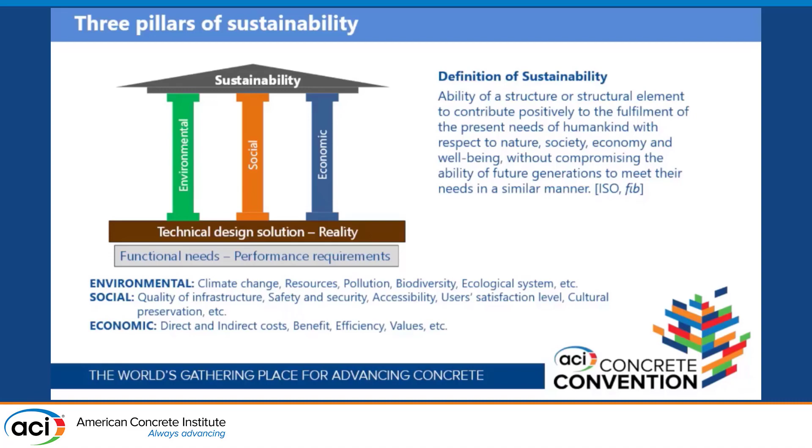So how we are going to include these three pillars of sustainability in the design codes is our main concern. Another issue is life cycle management. The life of a structure is divided into three stages in terms of life cycle considerations: the procurement stage, the use stage, and eventually the end-of-life stage.

The procurement stage includes the vision, plan, surveying, design, and execution: how to construct, how to design, or how to provide the structure to the people. This is just before starting the use stage. And the use stage is probably the longest period of the life of the structure, including operation, conservation, upgrades, and so on.

So through the maintenance work, we should consider the use stage, how we keep the structural performance of structural functions to be satisfied in the design and constructions. And eventually it comes to the life end stages. So probably disposal or replacement by the new structure and so on.

So at the life end stages, we should consider how to dispose the structure, or how to recycle, reuse, or how to replace the new structures. So this is very important, but actually at the design stages, we are not easy to consider how we stop using the structures, but we should do it from the sustainability point of view. So you can understand that the sustainability considerations is a very close relation to how we manage the total life cycle of the structures.

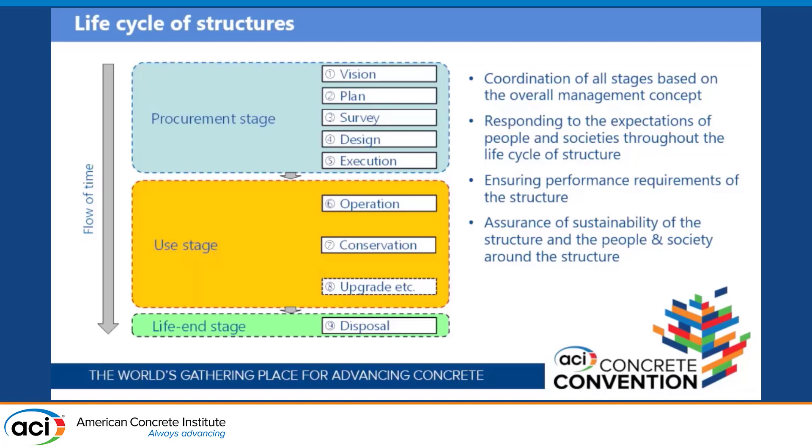So through the life cycle management, we should assure the sustainability of the structure and the people and society around the structure. So engineers should consider not only the sustainability of the structure, but also the sustainability of the people, society around the structure. So this is a very, very wide global idea how sustainability should be incorporated in the life cycle management.

So this slide is very small, so sorry, but this is the flow of life cycle management. We will make the strategies. In this slide, it is written as a scenario. So how we realize the sustainability of the structure, how we ensure the performance requirement of structure, this should be well considered at the very beginning of the life cycle of the structures.

Some people consider such strategies at the use stages, but it is very late. How to realize the structural sustainability should be considered at the very beginning of the life cycle, particularly for the initial design or basic design of the structures. And during the procurement stage, we should draw up the basic life cycle management scenarios, and this scenario is always updated to reflect the current situation of the structures.

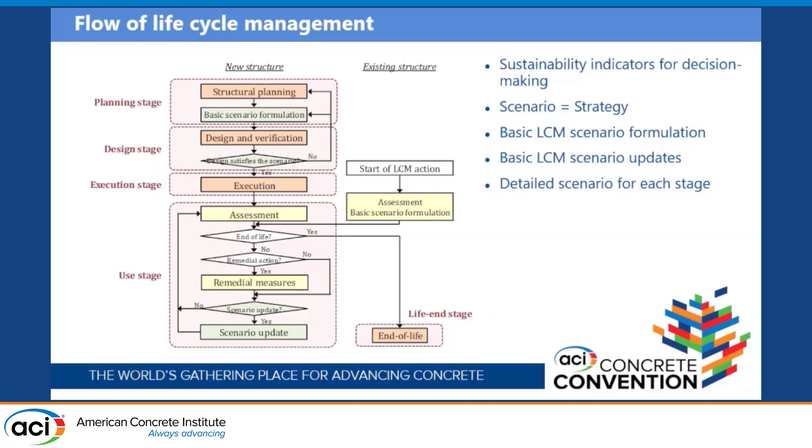And of course, design, execution, and maintenance work should be done with an individual scenario for each stage. So you can understand that we need some very close coordination among the stages. And for the sustainability requirements, at first we should set up which aspect or which detailed aspect of the sustainability should be ensured during the life cycle of the structure. So we collect the basic information about the sustainability of the social, environmental, and economic aspects.

And performance and sustainability requirements will be determined before starting the verification, and structural profiles, material production, and construction method and so on will be considered based on the performance and sustainability requirements. And then we set up the indicators for evaluation of sustainability throughout the life cycle of structures. Then we make the next stage of design, construction, and maintenance work.

And before starting that, we should verify or evaluate whether our basic scenario is reasonable or not, whether the basic strategy is okay or not. Is something wrong? If we can find some improvement of our basic scenarios, we should modify: the requirement should be changed, or some method of the design, construction, and maintenance will be improved, or also the indicators for evaluation of sustainability should be reconsidered and so on.

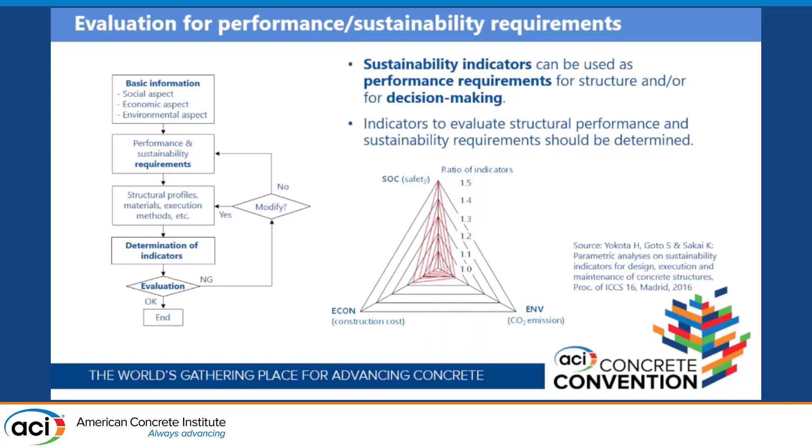So you can find how the most suitable solution can be found among these parametric studies. It can be proposed as this paper. If you're interested in that, please refer to this document.

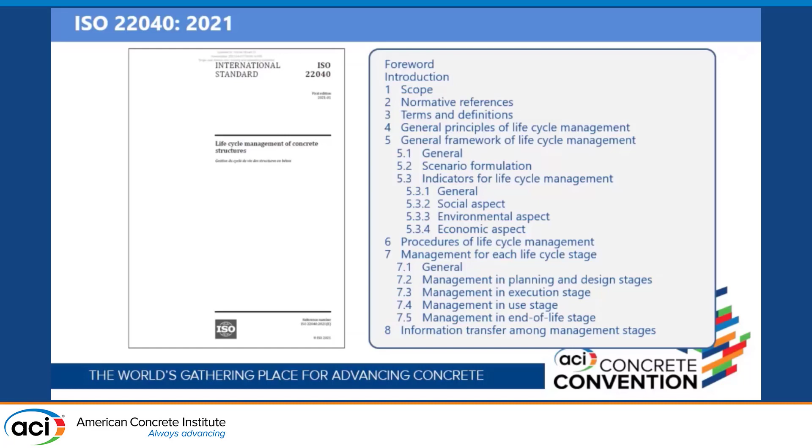The first example about the sustainability design code is ISO 22040, published in 2021. The table of contents is shown on the right-hand side. You can see the indicators for life cycle management are similar to the indicators for sustainability evaluation, like social, environmental, and economic aspects.

This document, entitled Life Cycle Management Concrete Structures, was developed by ISO TC71 Working Group 1, Life Cycle Management Concrete Structures, and I myself am the convener of this working group. The project started in September 2016.

We needed 5 years for publication, and finally in January 2021 it was published. It covers the framework and general principle of life cycle management. It is not a specific document; that is not covered in this document.

That's why we are making another series of documents relating to life cycle management. For example, Part 2 covers life cycle management particularly at the structural planning and design stages, currently at the committee draft stage. Part 3 covers the execution stage, also under development, currently at the working draft stage.

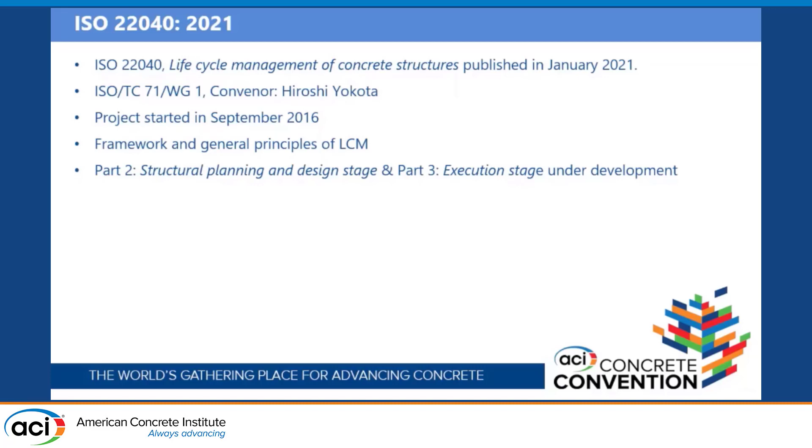These two parts will provide much more detailed specification on how we consider sustainability in these stages of the life cycle of the structures.

Clause 5 of this document, the general framework of life cycle management, gives the specification that when implementing life cycle management, appropriate scenarios shall be created as measures to ensure performance requirements are met during the life cycle of the structure, and indicators are set appropriately.

We should set up the performance requirement with a particularly suitable indicator to evaluate the life cycle of the structures. The basic scenario shall include the fundamental strategies for how the structure will be managed in terms of sustainability, including not only environmental but also social and economic aspects. These indicators should be involved in the design if possible.

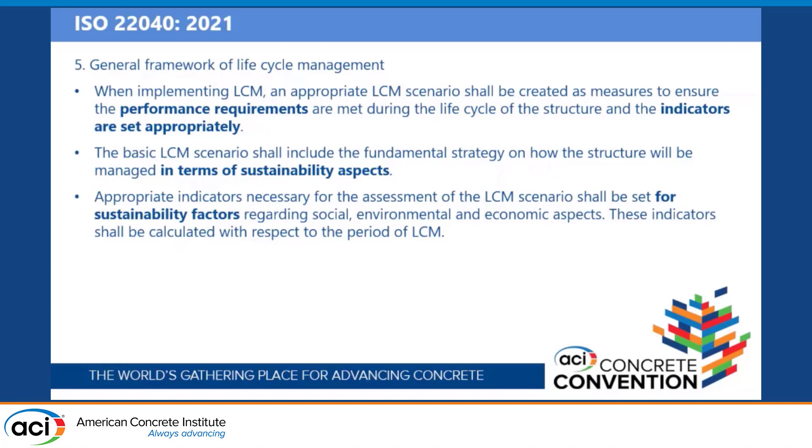Appropriate indicators necessary for the assessment of the life cycle management scenario shall be set for sustainability factors regarding social, environmental, and economic aspects. These indicators shall be calculated with respect to the period of life cycle management, so life cycle considerations are necessary for the evaluation.

A bit more detail is given in subclause 5.3, indicators for life cycle management. As mentioned, for the social aspect to be assessed, indicators should objectively express the performance of the structure, such as the safety of the structure or construction engineers, and so on.

It is difficult to set quantitative indicators for qualities such as adaptability, comfort, cultural values, and social contribution. These shall be considered in a social scientific manner. Some important social aspect indicators are not easily quantified—we understand their importance, but it's very difficult to express them as numerical values. In such cases, they are still required to be considered in a social scientific manner. That is the requirement of the social aspect.

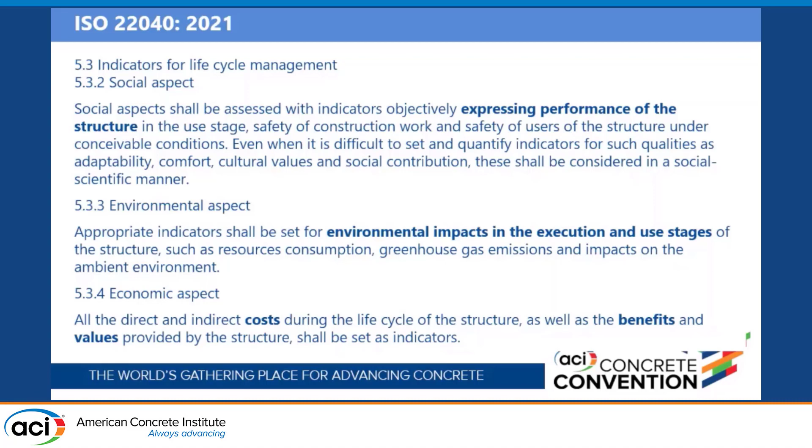For the environmental aspect, indicators for environmental impact in the execution and use stages of structures include resource consumption, greenhouse emissions, and impact on the ambient environment, among others. For the economic aspect, cost, benefit, and values as already mentioned should sometimes be considered.

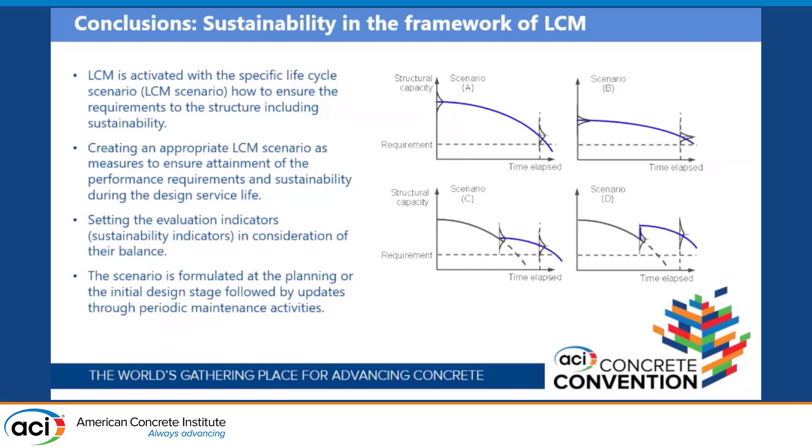There are some examples for indicator evaluation in this document, but due to time limitations I'd like to skip this slide. It is a concluding summary of sustainability as specified in ISO 22040. The next one is ISO 19338, entitled Performance Requirement for Standard on Concrete Structures.

It is being developed in TC71 Subcommittee 4, Working Group 1, Performance Requirements for Structural Concrete, and its convener is Professor Sofia Diniz in Brazil. This document was originally published in 2014, entitled Performance and Assessment Requirements for Design Standards on Structural Concrete.

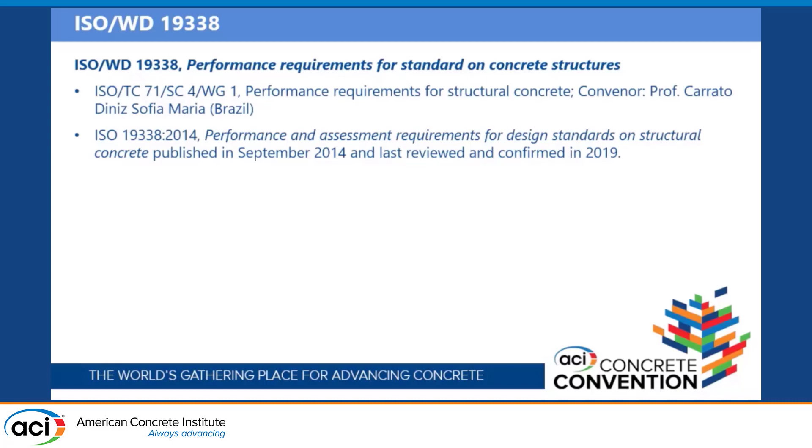It was last reviewed and confirmed in 2019, and we decided to revise this document to make it more practical, including sustainability issues. The left-hand slide shows the original document's table of contents from chapter 1 to 8, and the revised document—possibly, not finalized yet.

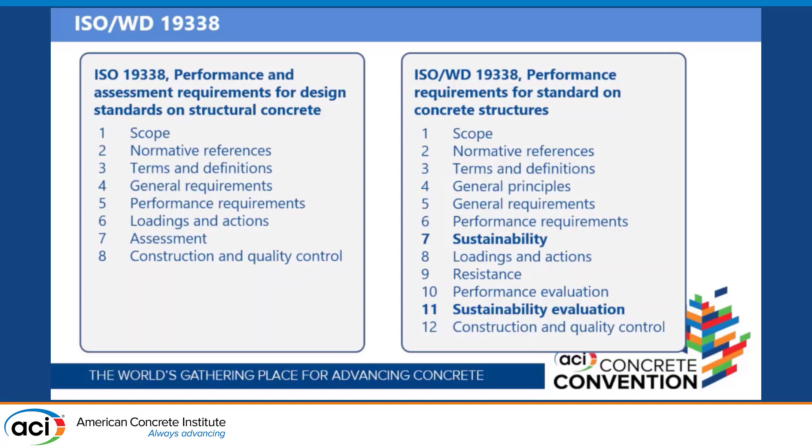We'd like to add new chapters related to sustainability and sustainability evaluation, and some more minor revisions have already been made to the table of contents.

For the general principle of the structural concrete design code, the purpose, function, and performance requirements of the structure to be ensured during the life cycle, during the design service life, shall be determined. This performance requirement shall be appropriately selected based on the ability of the structure to maintain its function and sustainability.

So the performance requirement has a very close relation to the function and sustainability of the structure—that is definitely declared. Sustainability concerns are given in another chapter, with some introductory statements provided there.

For design and assessment approaches, we add safety, serviceability, restorability, structural integrity, robustness, sustainability, environmental adequacy, and durability. These are the indicators we consider for the design and maintenance of structures.

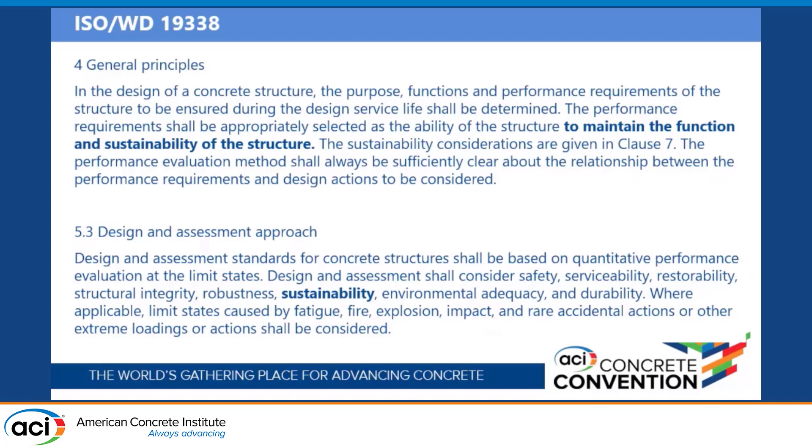Sustainability of the structure should be evaluated from three aspects, and the design should be carried out so that each of these aspects can be maintained in a well-balanced manner. The social, environmental, and economic aspects are not all going in the same direction. If we consider a more environmentally friendly structure, generally it costs more. And if we construct a safer structure, it also needs more cost. So sustainability is not always the best result for our consideration.

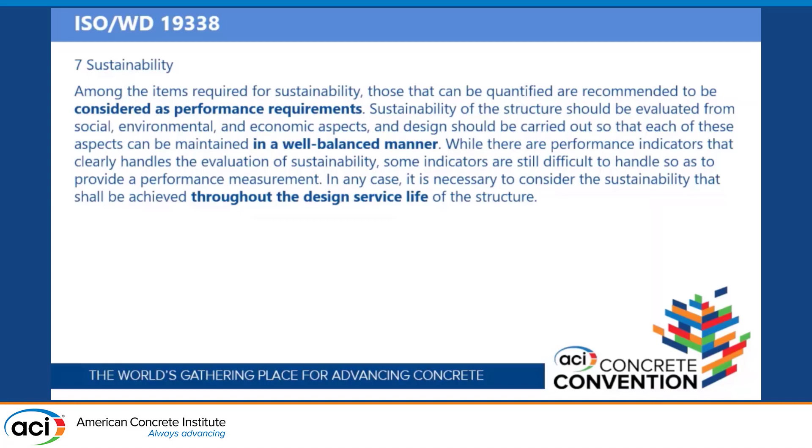So we need a balance of these indicators, but it is very difficult how we balance them. We are still keeping consideration on how we specify how we balance these indicators, and this should be included in this document. And also the principles of design and assessment with respect to sustainable development, evaluation of performance should be conducted for these three aspects of sustainability.

And it is preferable to deal with this as performance requirements, as I already mentioned. Some aspects shall be defined based on the society and client needs. So these requirements depend on the structures, structural condition, owners, or considerations, and so on. This document cannot specify how to limit these indicators, but we just give some idea of how we consider them. I think this is the same as the ACI approach.

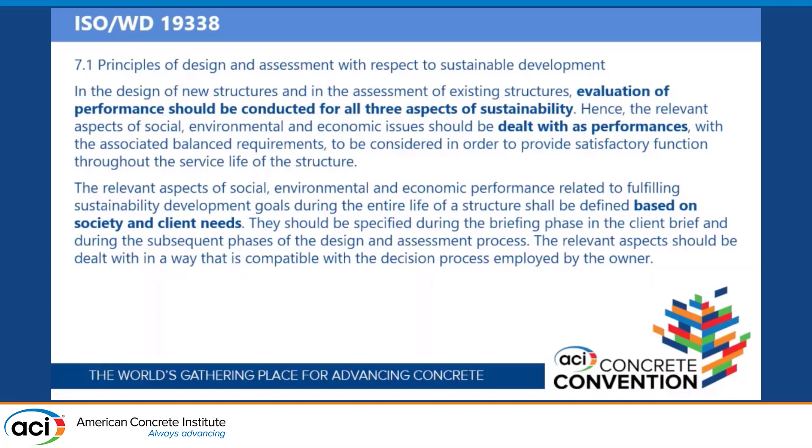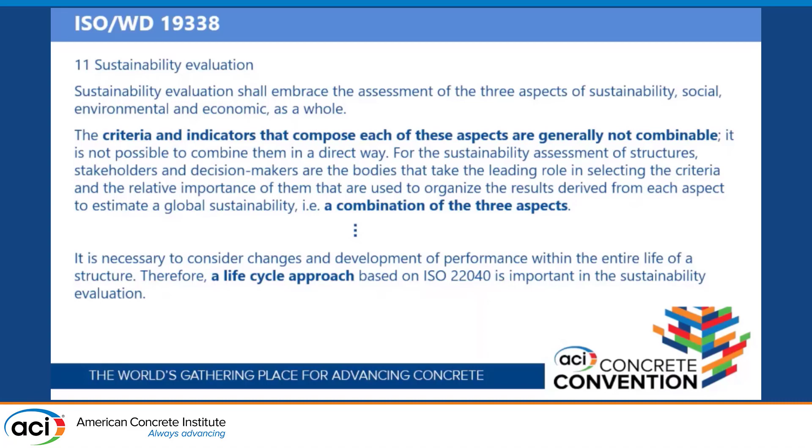Towards the sustainability requirement, we should include some more sentences with such kinds of situations. And life cycle approaches based on ISO 22040 is important for the sustainability evaluation. This will be added.

The final one is the common principle of structural design for buildings and civil infrastructure. This is a tentative title, and it's under development. We established a Japan Society of Civil Engineers and Architectural Institute of Japan joint task force to make a common principle of structural design code, and I am serving as convener of these activities.

This common code is not only for concrete structures, but can be applied regardless of the objectives, forms, and types of structure and material used. It can also be applied for new structures as well as already existing structures. We are now in the middle stages of development, and we hope within the next few years to complete this work and have it published.

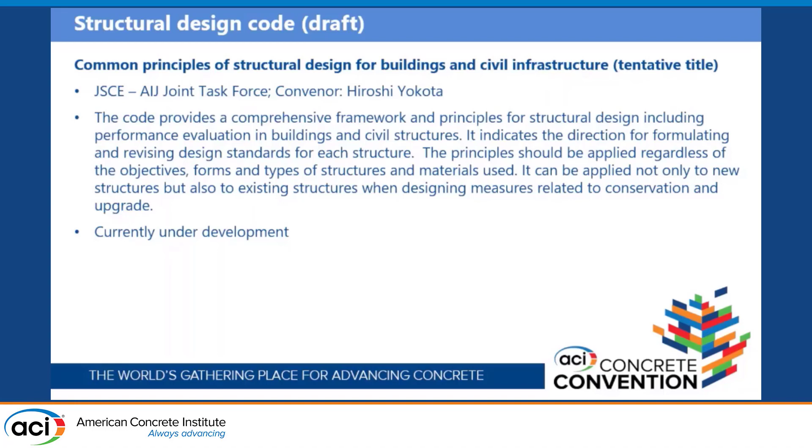And the basis for structural design: this is almost the same as the ISO document already introduced, but we emphasize the engineering value standard to be well specified for this common code.

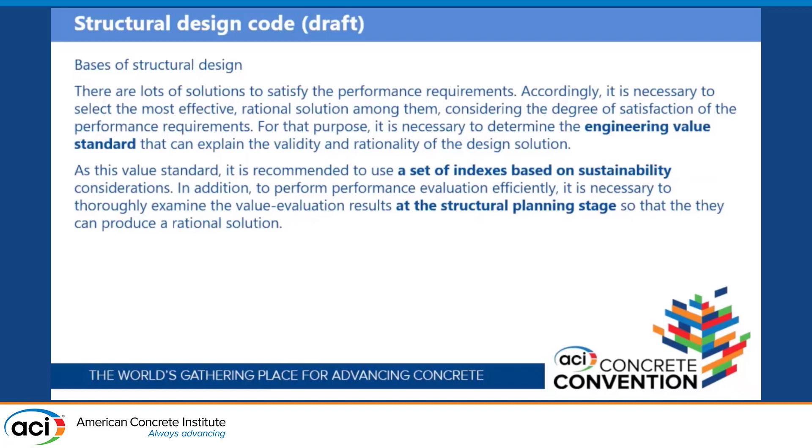And also the set of indexes based on sustainability have already increased, but it should be considered at the structural planning stages.

And the performance requirement is the same as ISO 19338: how the structure's performance is required to achieve its purpose, to ensure its function, and to make society sustainable. The performance requirements shall be appropriately determined to maintain the function and sustainability of the structures. And the level of the performance requirements shall be clearly defined, taking into consideration the social impact and the degree of achievement of the purpose and function of the structures.

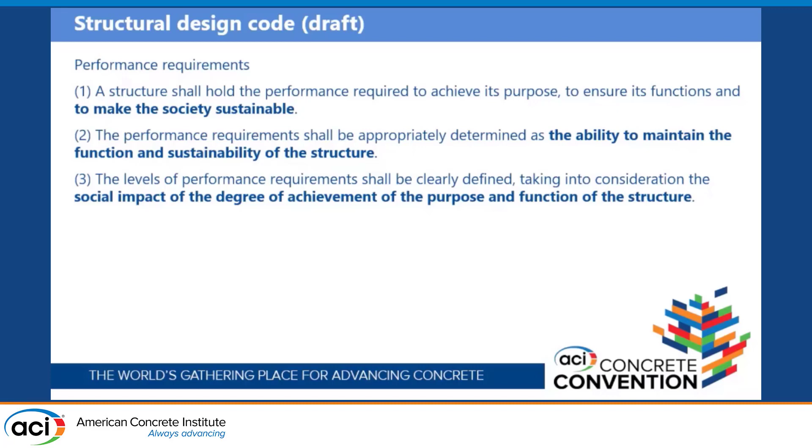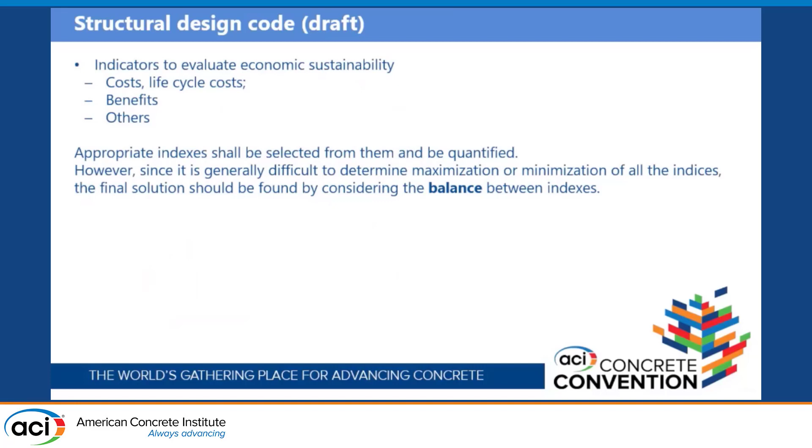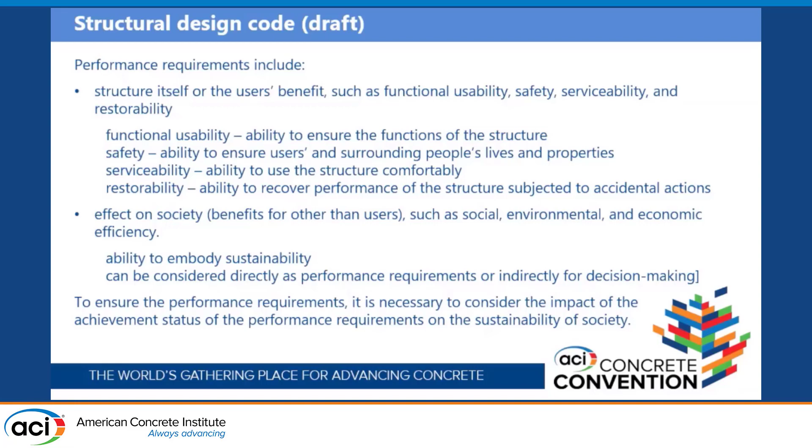Some evaluation indicators will also be covered in the documents, and of course the balance between these indicators is necessary. So the performance requirements included are the same as ISO 19338, such as functional usability, safety, serviceability, and restorability, and also the ability to embody sustainability is one of the performances to be considered in design.

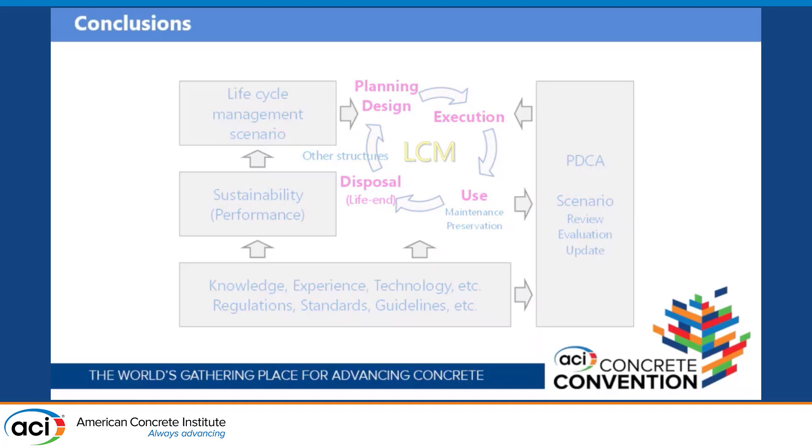So this is almost the final slide. This is the idea of what we are going to specify in the design regulation, standard, and guideline to realize sustainability as well as life cycle management, to realize sustainability in a more objective manner. This is the conclusion of my talk.

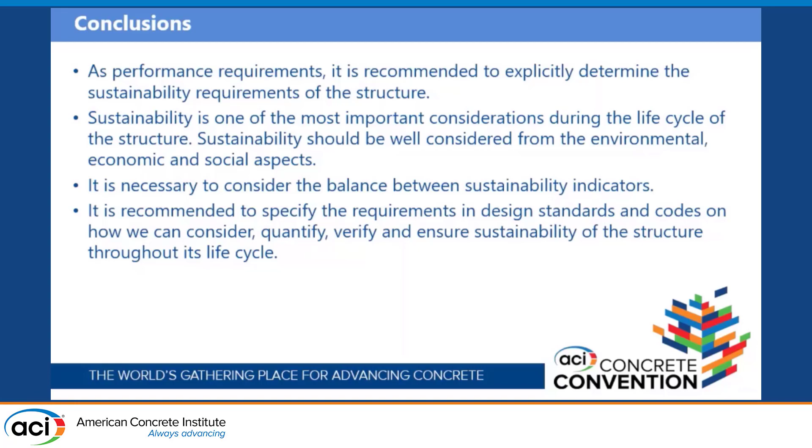As a performance requirement, it is recommended to explicitly determine the sustainability requirement of the structures. Sustainability is one of the most important considerations during the life cycle of the structures, and it is necessary to consider the balance between the sustainability indicators. It is recommended to specify the requirement in the design standard code on how we consider, quantify, verify, and ensure sustainability of the structure throughout its life cycle. Thank you very much for your kind attention.